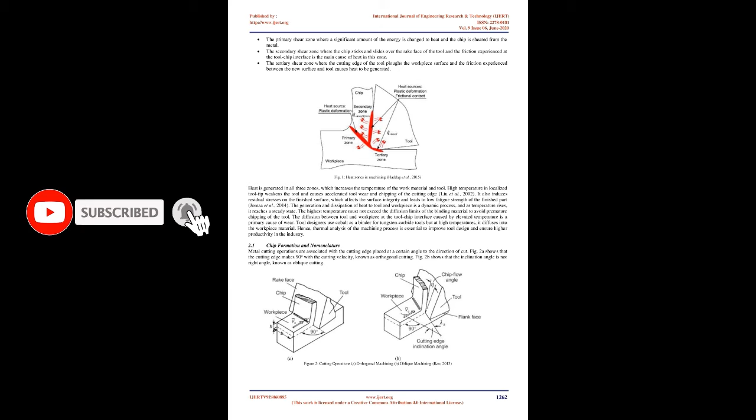2.0 Theoretical background. Due to the advancement in manufacturing technology, extensive research attempts have been made to evaluate machining performance through predictive or simulation modeling. Hendry et al., 2010, opined that the need to improve productivity and maintain good quality for machined parts had encouraged several researchers committed to studying the effect of machining parameters using a simulation model. The interfacial temperature during machining is an important parameter for predicting the useful life of the tool and surface integrity of the job. 3 deformation zones exist during machining, viz.

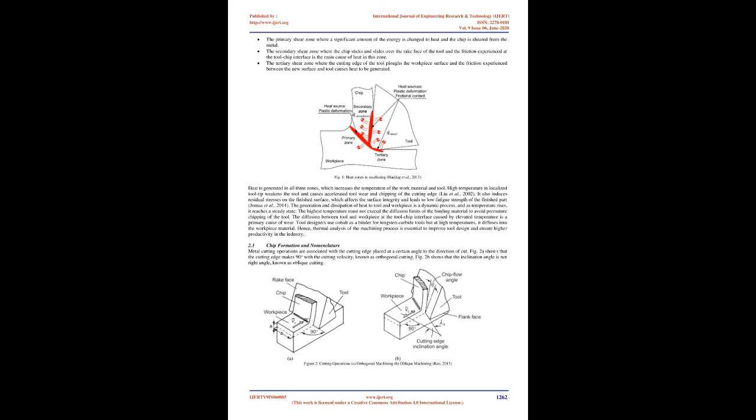The primary shear zone, where a significant amount of the energy is changed to heat and the chip is sheared from the metal. The secondary shear zone, where the chip sticks and slides over the rake face of the tool and the friction experienced at the tool-chip interface is the main cause of heat in this zone. The tertiary shear zone, where the cutting edge of the tool plows the workpiece surface and the friction experienced between the new surface and tool causes heat to be generated.

Heat is generated in all 3 zones, which increases the temperature of the work material and tool. High temperature in localized tool tip weakens the tool and causes accelerated tool wear and chipping of the cutting edge, Liu et al., 2002. It also induces residual stresses on the finished surface, which affects the surface integrity and leads to low fatigue strength of the finished part, Jomaa et al., 2014.

The generation and dissipation of heat to tool and workpiece is a dynamic process, and as temperature rises, it reaches a steady state. The highest temperature must not exceed the diffusion limits of the binding material to avoid premature chipping of the tool.

The diffusion between tool and workpiece at the tool-chip interface caused by elevated temperature is a primary cause of wear. Tool designers use cobalt as a binder for tungsten carbide tools, but at high temperatures, it diffuses into the workpiece material. Hence, thermal analysis of the machining process is essential to improve tool design and ensure higher productivity in the industry.

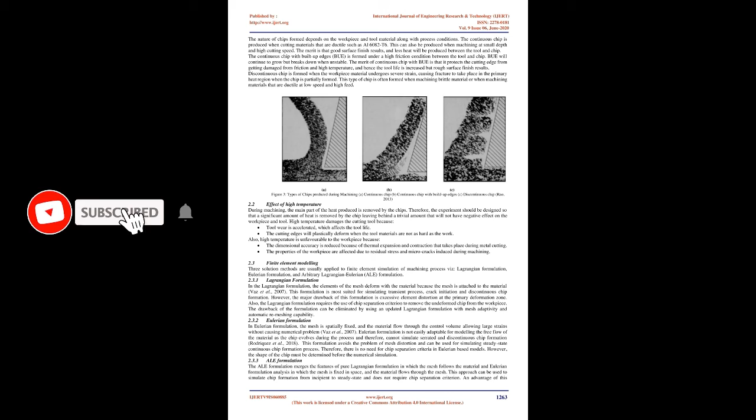The nature of chips formed depends on the workpiece and tool material along with process conditions. The continuous chip is produced when cutting materials that are ductile, such as Al6082T6. This can also be produced when machining at small depth and high cutting speed. The merit is that good surface finish results, and less heat will be produced between the tool and chip.

The continuous chip with built-up edges, BUE, is formed under a high friction condition between the tool and chip. BUE will continue to grow but breaks down when unstable. The merit of continuous chip with BUE is that it protects the cutting edge from getting damaged from friction and high temperature, and hence the tool life is increased but rough surface finish results.

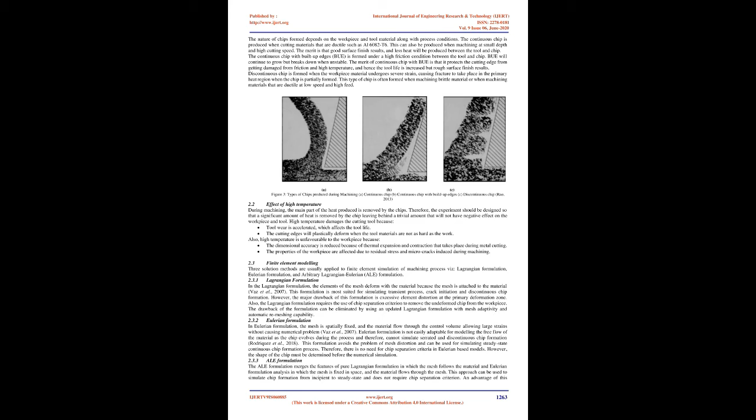Discontinuous chip is formed when the workpiece material undergoes severe strain, causing fracture to take place in the primary heat region when the chip is partially formed. This type of chip is often formed when machining brittle material or when machining materials that are ductile at low speed and high feed.

2.2 Effect of high temperature. During machining, the main part of the heat produced is removed by the chips. Therefore, the experiment should be designed so that a significant amount of heat is removed by the chip, leaving behind a trivial amount that will not have negative effect on the workpiece and tool. High temperature damages the cutting tool because tool wear is accelerated, which affects the tool life. The cutting edges will plastically deform when the tool materials are not as hard as the work.

Also, high temperature is unfavorable to the workpiece because the dimensional accuracy is reduced because of thermal expansion and contraction that takes place during metal cutting. The properties of the workpiece are affected due to residual stress and micro cracks induced during machining.

2.3 Finite element modeling. Three solution methods are usually applied to finite element simulation of machining process, viz., Lagrangian formulation, Eulerian formulation, and arbitrary Lagrangian Eulerian (ALE) formulation. 2.3.1 Lagrangian formulation. In the Lagrangian formulation, the elements of the mesh deform with the material because the mesh is attached to the material, Vaz et al. 2007.

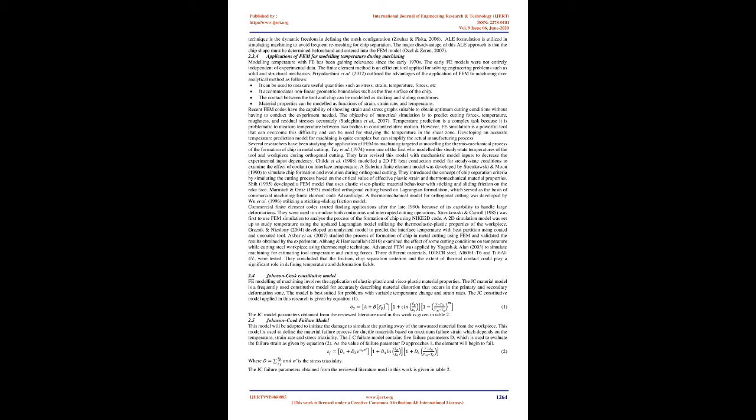2.3.2 Eulerian formulation. In Eulerian formulation, the mesh is spatially fixed, and the material flows through the control volume, allowing large strains without causing numerical problem, Vaz et al. 2007. Eulerian formulation is not easily adaptable for modeling the free flow of the material as the chip evolves during the process, and therefore, cannot simulate serrated and discontinuous chip formation, Rodriguez et al. 2018.

This formulation avoids the problem of mesh distortion and can be used for simulating steady-state continuous chip formation process. Therefore, there is no need for chip separation criteria in Eulerian-based models. However, the shape of the chip must be determined before the numerical simulation.

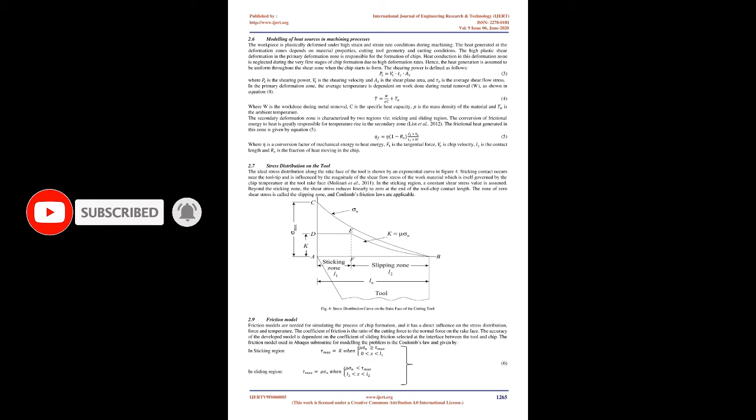2.3.3 ALE formulation. The ALE formulation merges the features of pure Lagrangian formulation, in which the mesh follows the material, and Eulerian formulation analysis, in which the mesh is fixed in space and the material flows through the mesh. This approach can be used to simulate chip formation from incipient to steady state and does not require a chip separation criterion. An advantage of this technique is the dynamic freedom in defining the mesh configuration (Zouhar and Piska, 2008).

ALE formulation is utilized in simulating machining to avoid frequent remeshing for chip separation. The major disadvantage of this ALE approach is that the chip shape must be determined beforehand and entered into the FEM model (Ozel and Zeren, 2007).

2.3.4 Applications of FEM for modeling temperature during machining. Modeling temperature with FE has been gaining relevance since the early 1970s. The early FE models were not entirely independent of experimental data. The finite element method is an efficient tool applied for solving engineering problems such as solid and structural mechanics. Priyadarshini et al. (2012) outline the advantages of the application of FEM to machining over analytical methods as follows.

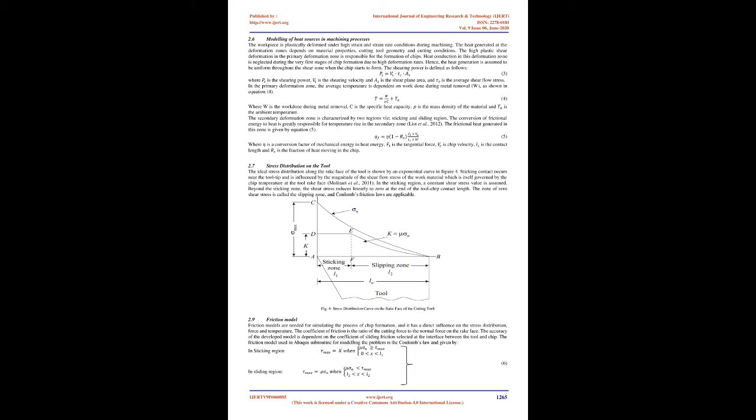motion. However, FE simulation is a powerful tool that can overcome this difficulty and can be used for studying the temperature in the shear zone. Developing an accurate temperature prediction model for machining is quite complex but can simplify the actual manufacturing process. Several researchers have been studying the application of FEM to machining targeted at modeling the thermomechanical process of chip formation in metal cutting.

Tay et al. (1974) were among the first who modeled the steady-state temperatures of the tool and workpiece during orthogonal cutting. They later revised this model with mechanistic model inputs to decrease the experimental input dependency. Childs et al. (1988) modeled a 2D FE heat conduction model for steady-state conditions to examine the effect of coolant on interface temperature. A Eulerian finite element model was developed by Strenkowski and Moon,

1990, to simulate chip formation and evolution during orthogonal cutting. They introduced the concept of chip separation criteria by simulating the cutting process based on the critical value of effective plastic strain and thermomechanical material properties. Shih (1995) developed a FEM model that uses elastic viscoplastic material behavior with sticking and sliding friction on the rake face. Marusich and Ortiz (1995) modeled orthogonal cutting based on Lagrangian formulation, which served as the basis of commercial machining

finite element code AdvantEdge. A thermomechanical model for orthogonal cutting was developed by Wu et al. (1996) utilizing a sticking-sliding friction model. Commercial finite element codes started finding applications after the late 1990s because of their capability to handle large deformations. They were used to simulate both continuous and interrupted cutting operations.

Strenkowski and Carroll (1985) were first to use FEM simulation to analyze the process of chip formation using the NIKE2D code. A 2D simulation model was set up to study temperature using the updated Lagrangian model utilizing the thermoelastic-plastic properties of the workpiece. Grzesik and Nieslony (2004) developed an analytical model to predict the interface temperature with heat partition using coated and uncoated tools. Akbar et al. (2007) studied the process of chip formation in metal cutting using FEM and validated the results obtained by experiment.

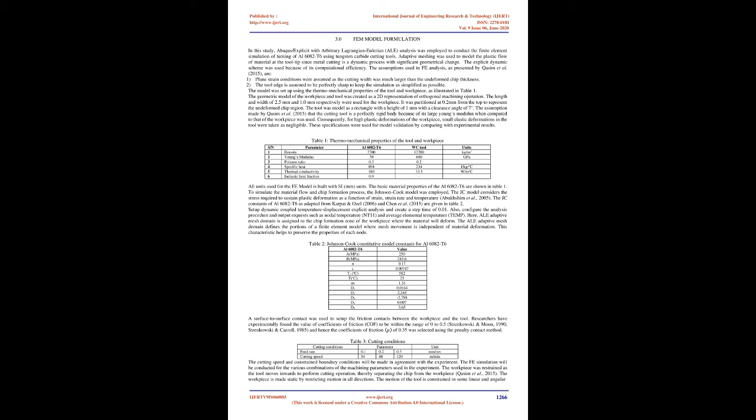Abhang and Hameedullah (2010) examined the effect of some cutting conditions on temperature while cutting a steel workpiece using the thermocouple technique. Advanced FEM was applied by Yogesh and Allen (2003) to simulate machining for estimating tool temperature and cutting forces. Three different materials, 1018 CR steel, Al 6061-T6 and Ti-6Al-4V, were tested. They concluded that the friction, chip separation criterion and the extent of thermal contact could play a significant role in defining temperature and deformation fields.

2.4 Johnson-Cook constitutive model. FE modeling of machining involves the application of elastic-plastic and viscoplastic material properties. The JC material model is a frequently used constitutive model for accurately describing material distortion that occurs in the primary and secondary deformation zones. The model is best suited for problems with variable temperature change and strain rates. The JC constitutive model applied in this research is given by equation 1. The JC model parameters obtained from the reviewed literature used in this work are given in Table 2.

2.5 Johnson-Cook failure model. This model will be adopted to initiate the damage to simulate the parting away of the unwanted material from the workpiece. This model is used to define the material failure process for ductile materials based on maximum failure strain, which depends on the temperature, strain rate, and stress triaxiality. The JC failure model contains 5 failure parameters D, which are used to evaluate the failure strain as given by equation 2. As the value of failure parameter D approaches 1, the element will begin to fail.

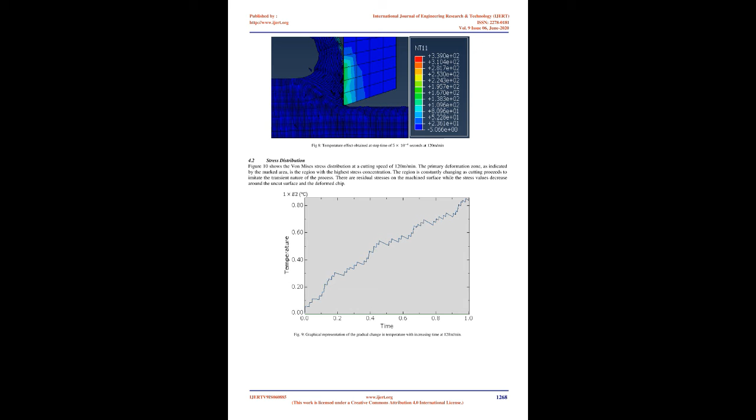3.0 FEM model formulation. In this study, Abaqus/Explicit with arbitrary Lagrangian Eulerian, ALE, analysis was employed to conduct the finite element simulation of turning of Al6082-T6 using tungsten carbide cutting tools. Adaptive meshing was used to model the plastic flow of material at the tool tip, since metal cutting is a dynamic process with significant geometrical change. The explicit dynamic scheme was used because of its computational efficiency.

The assumptions used in FE analysis, as presented by Qasim et al., 2015, are: 1. Plane strain conditions were assumed as the cutting width was much larger than the undeformed chip thickness. 2. The tool edge is assumed to be perfectly sharp to keep the simulation as simplified as possible. The model was set up using the thermomechanical properties of the tool and workpiece, as illustrated in Table 1.

The geometric model of the workpiece and tool was created as a 2D representation of orthogonal machining operation. The length and width of 2.5 mm and 1 mm respectively were used for the workpiece. It was partitioned at 0.2 mm from the top to represent the undeformed chip region. The tool was modeled as a rectangle with a height of 1 mm with a clearance angle of 7 degrees.

The assumption made by Qasim et al., 2015, that the cutting tool is a perfectly rigid body because of its large Young's modulus when compared to that of the workpiece was used. Consequently, for high plastic deformations of the workpiece, small elastic deformations in the tool were taken as negligible. These specifications were used for model validation by comparing with experimental results. All units used for the FE model are built with SI (mm) units.

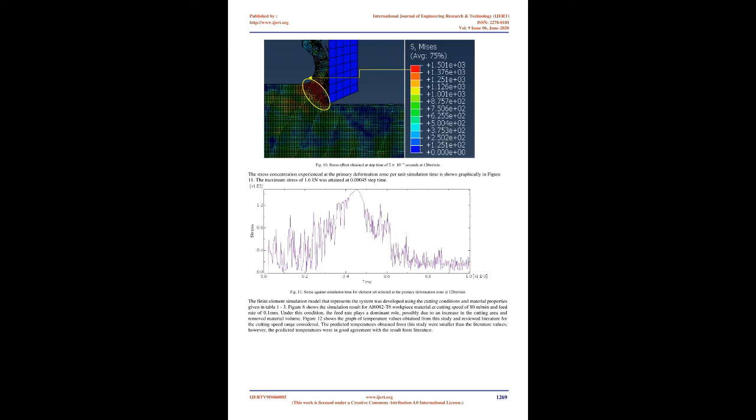A surface-to-surface contact was used to set up the friction contacts between the workpiece and the tool. Researchers have experimentally found the value of coefficients of friction, COF, to be within the range of 0 to 0.5, Strenkowski and Moon, 1990, Strenkowski and Carroll, 1985, and hence the coefficient of friction of 0.35 was selected using the penalty contact method. The cutting speed and constrained boundary conditions will be made in agreement with the experiment.

The FE simulation will be conducted for the various combinations of the machining parameters used in the experiment. The workpiece was restrained as the tool moves inwards to perform cutting operation, thereby separating the chip from the workpiece, Qasim et al., 2015. The workpiece is made static by restricting motion in all directions. The motion of the tool is constrained in some linear and angular directions but allowed to travel only in the x direction. The cutting process is achieved by setting the cutting conditions as presented in Table 3, and the direction of motion is shown in Figure 6.

An initial temperature of 20 °C was assumed as a boundary condition for both the workpiece and the tool. The default value of h for free air convection is 20 W/m2 °C and is assumed to be 20 °C as the surrounding temperature is taken as room temperature.

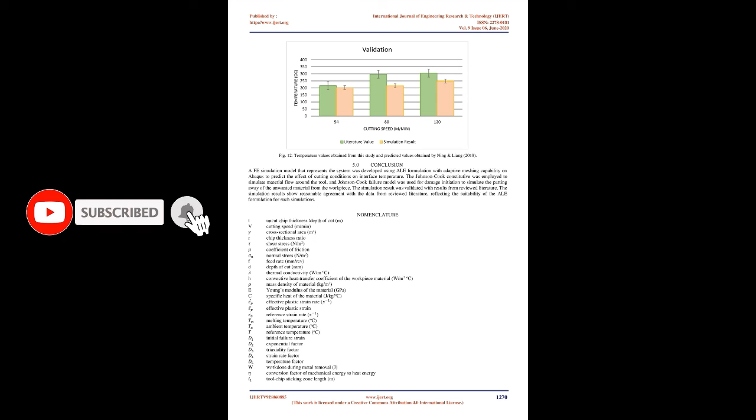The CPE4RT element type, which is a 4-node bilinear coupled temperature displacement element with reduced integration, was applied with element deletion option to allow material separation. Due to high element deformation, the hourglass control was used. A total of 25,000 elements were generated for the workpiece and 112 elements for the tool. The schematic diagram for the simulation model is shown in Figure 7. The element size in this model was varied between 0.001 to 0.05 because of its influence on the predicted temperature.

4.0 Simulation results. 4.1 Temperature distribution. Heat transfer in metal cutting occurs at the deformation zones due to the plastic deformation of the work material and interfacial friction. The main part of the heat produced is removed by the chips through conduction while some heat is lost to the surrounding through convection. Fig 8 shows the temperature band when cutting at a speed of 120 m/min and feed of 0.3 mm/rev. It is evident that the major portion of the heat is carried away by the chip produced.

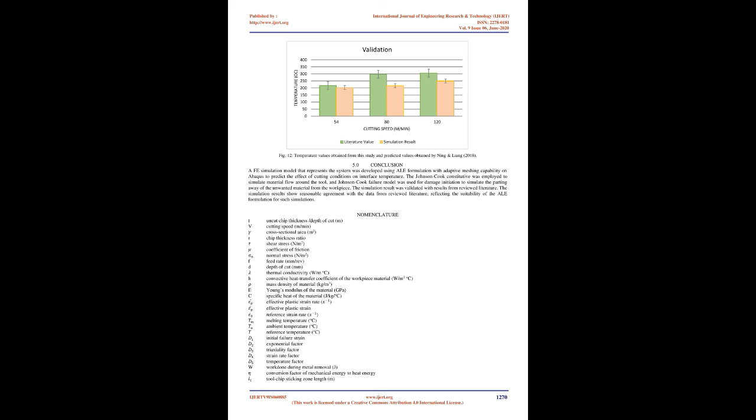The simulation results at different cutting speeds reveal that an increase in cutting speed will result in a corresponding increase in the temperature, as shown in Fig 9. This is because an increase in cutting speed will give rise to increased friction, thereby generating more heat at the chip-tool interface. 4.2 Stress distribution.

Figure 10 shows the von Mises stress distribution at a cutting speed of 120 m/min. The primary deformation zone, as indicated by the marked area, is the region with the highest stress concentration. The region is constantly changing as cutting proceeds to imitate the transient nature of the process. There are residual stresses on the machined surface while the stress values decrease around the uncut surface and the deformed chip. The stress concentration experienced at the primary deformation zone per unit simulation time is shown graphically in Figure 11.

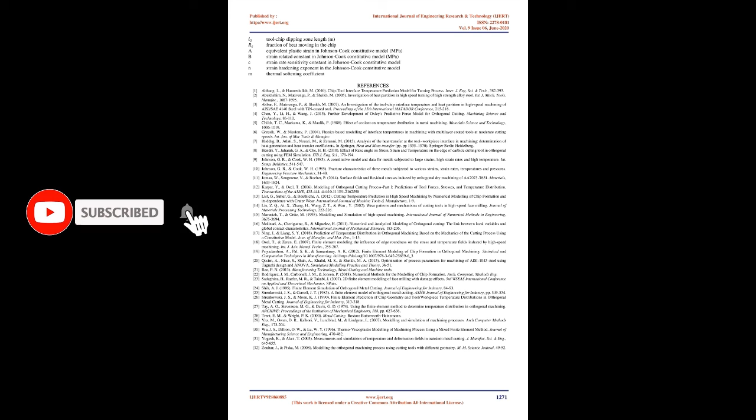Figure 12 shows the graph of temperature values obtained from this study and reviewed literature for the cutting speed range considered. The predicted temperatures obtained from this study were smaller than the literature values; however, the predicted temperatures were in good agreement with the result from literature.

5.0 Conclusion. An FE simulation model that represents the system was developed using ALE formulation with adaptive meshing capability on Abaqus to predict the effect of cutting conditions on interface temperature. The Johnson-Cook constitutive model was employed to simulate material flow around the tool, and Johnson-Cook failure model was used for damage initiation to simulate the parting away of the unwanted material from the workpiece.

The simulation result was validated with results from reviewed literature. The simulation results show reasonable agreement with the data from reviewed literature, reflecting the suitability of the ALE formulation for such simulations.